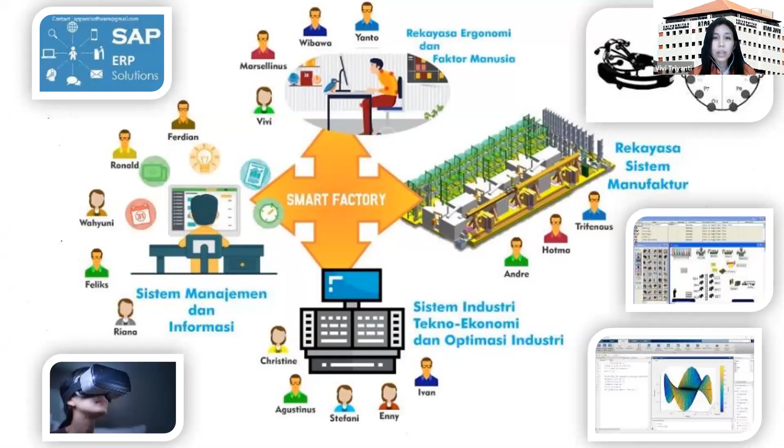Di TI Atmajaya sendiri, kita mempunyai banyak tenaga pengajar, kemudian lab yang sudah diceritakan oleh Pak Felix, untuk bisa menjadi smart factory yang bisa menghasilkan lulusan yang siap menghadapi era industri 4.0. Oke, kita akan memasuki acara utama kita, yaitu paparan mengenai smart manufacturing.

Sebelumnya, perkenankan saya untuk memperkenalkan Profesor Huang. Halo, Profesor.

Nice to meet you again in this online room. Hopefully you're always fine and safe, especially in this pandemic season. Okay, oh sorry, I have to unmute first the professor. Okay.

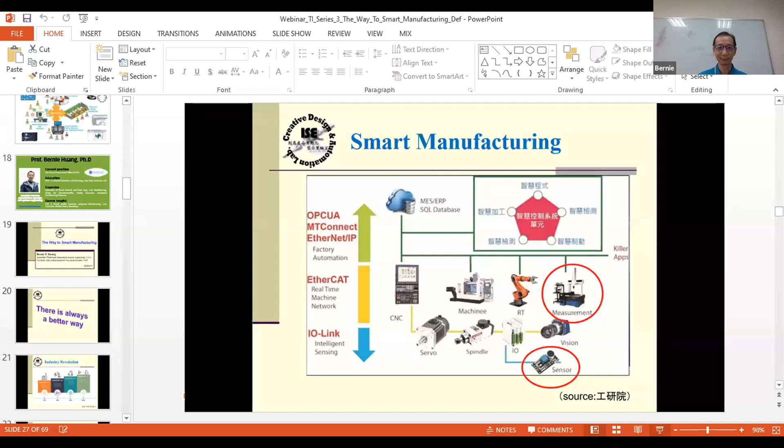Thank you. Okay. Hello, everyone, all the professors and students from Atma Jaya and Indonesia.

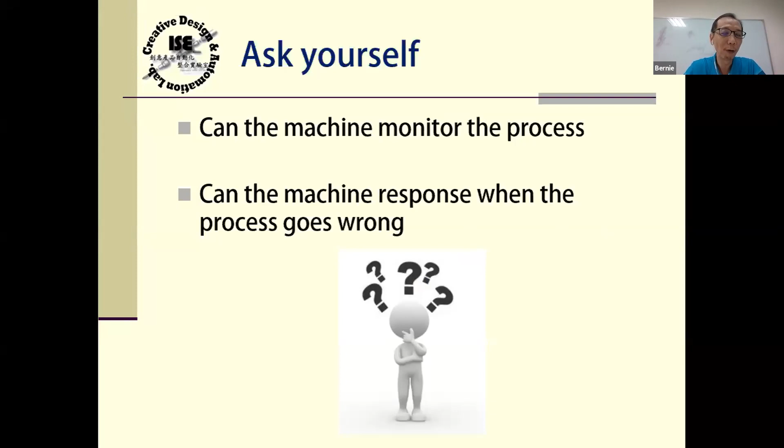So this is the basics - as a machine, as an equipment, as a manufacturing system, if you want to get into smart or intelligent manufacturing, you have to make sure the machine, the equipment, can do that. So I define smart manufacturing simply as: the machine can see something, it can feel something.

The machine can, for example, feel the temperature, feel the vibration, feel the noise. They can do something, they can feel something, they can know something different. So they can also think. They can make a decision when they feel something wrong, when they feel the temperature is too high. What will they do? Try to lower down the temperature, try to cool down, or try to turn off something to cool down. Those are some reactions we have to do.

And we also have to know the machine needs to know how to adjust. Once they make a decision, okay, it's too high, it's too hot, then how many degrees of temperature do I have to drop down, the interaction. So in order to do all these three things, to see something, to feel something, to think, to adjust, for the new equipment we use in smart manufacturing, we have to start using sensing technology, like a sensor.

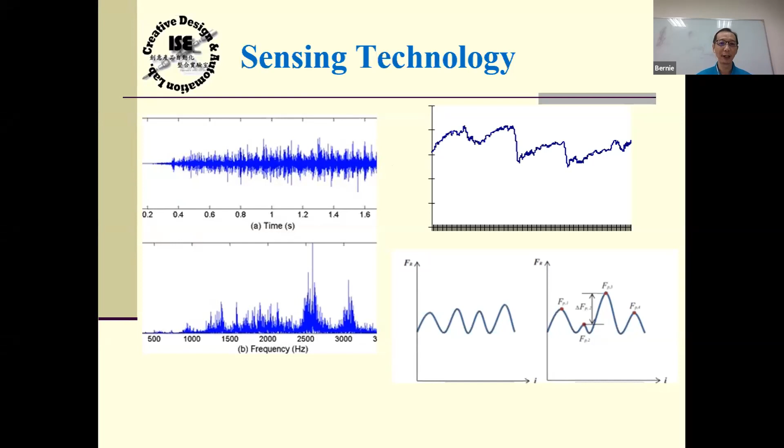For example, my specialty is in smart manufacturing for quality, so I'm pretty focused on quality issues. That means everything when we fabricate, when we make it, we think about the quality. Just like the example I mentioned earlier, the coffee bean - for the coffee bean, I would like to know if it's in good quality or not, so I have to look at the signal to see what kind of signal is good for it. Once we got that, the next stage we have to do is make a proper decision.

All right, for the air conditioning, if the temperature is too high, what will I do? Right now, if the temperature is higher than what I expect, what will I do? If it's 1 degree higher, what will I do? 5 degrees higher, what will I do? So for different situations, we need to have a different response.

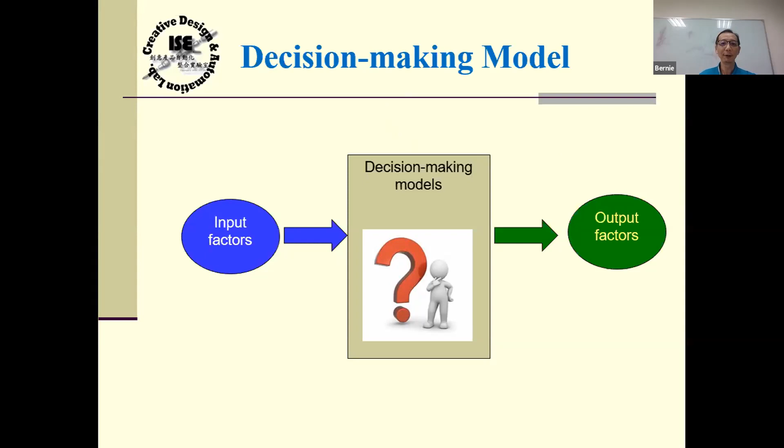That is what we have to do for the decision-making model. So for all those input factors, those sensing technologies, those sensors, we find a useful sensor and put it into the decision-making model. Eventually, the decision-making model will set up an algorithm and tell us what is the result, what's going to happen, what should I do, something like this. Okay, so this is what we always do.

And if you look at the current smart machines that we have, actually because of Industry 4.0, more and more equipment companies, when they develop their equipment, their machines, they try to make their machines smarter, so they can do something to replace our human operators.

So far, the machines that we have, that we always see, are like a healthy smart machine. That means the machine can do its own diagnosis. They can know their status.

So far, let me set up an example, the vehicle. Currently, vehicles are getting smarter and smarter. The vehicle right now can tell you, okay, you have to change the oil. Or sometimes the vehicle will tell you your tire pressure is a little bit low, and you have to fill it. Something like this. Those are the so-called status diagnosis.

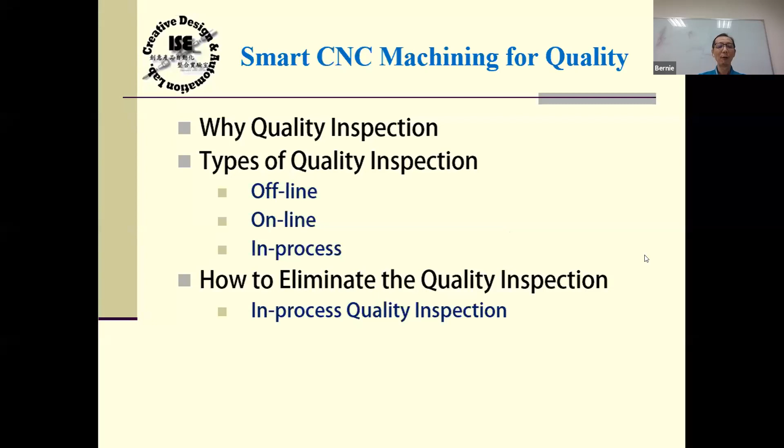So this is what we want to put into smart manufacturing. That means in the future, for every machine, we might mount a lot of sensors, and we might develop a lot of decision-making algorithms in there.

Once the machine starts to fabricate the material, at the same time I will know exactly if the quality is good or bad. So you don't have to bring the part to another machine to do another inspection. You don't have to do that. So that's the goal we would like to achieve in our smart machining, in our smart manufacturing. Once we can successfully conduct smart machining, then achieving smart manufacturing will no longer be a dream. It will be easier to do that.

So for this part, the earlier parts I already mentioned gave you a big picture about what is smart manufacturing, and what is required for smart manufacturing. For anyone interested in Industrial 4.0, if you are interested in smart manufacturing, this might be a direction, something you can think about for your future career, or something to prepare for your future study.

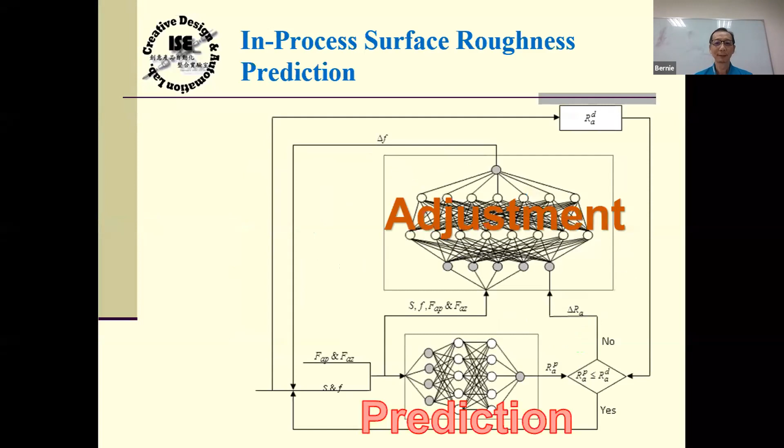That means we will let the machine - it's not only have the decision-making model, not only know how to adjust the machine status, but we also want the machine to have the ability to learn. Everybody, we have to know every machine, every equipment gets older and older. The condition of the new machine is quite different from the condition of the old machine. So when the machine gets old, some conditions change, and we also expect the machine has the ability to learn by itself, so it can adjust some of the parameters by itself. That's the key point I put in this paper.

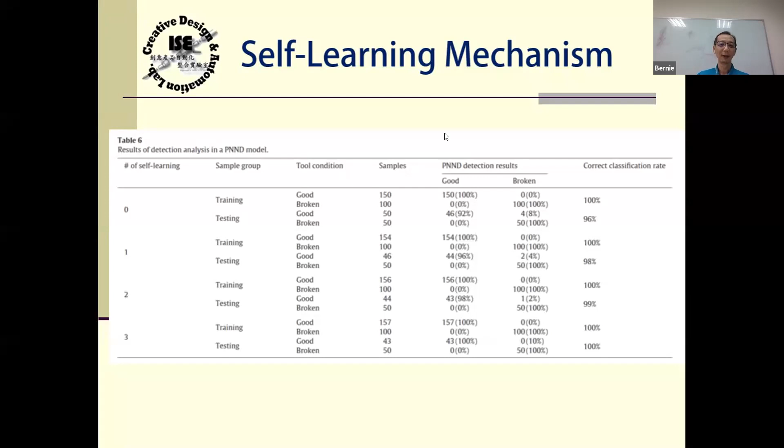All right, okay, how much time? So I think the time is probably up.

The following is just some of my own research, related to smart manufacturing and smart machining, using all those concepts that I mentioned earlier. The only difference might be the algorithm I use. For example, here I use neural networks to do surface roughness monitoring. So those could be very good research topics for students to conduct.

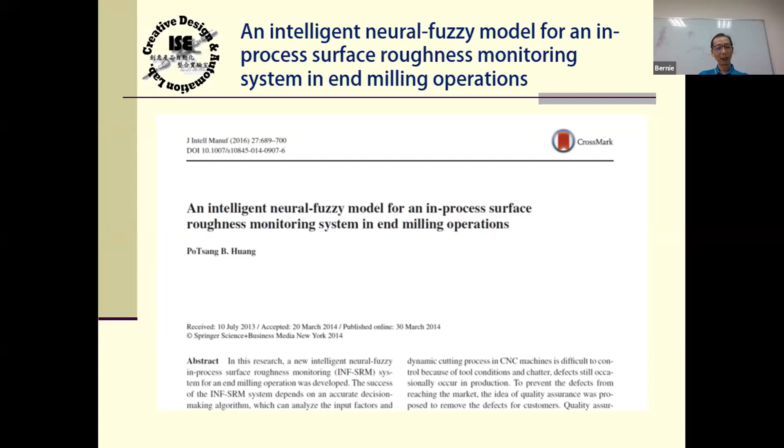So if right now you are an undergraduate student at Atma Jaya, and if you are interested, as the department chair mentioned about the 3+1+1 program, and if you are interested in this area, you can come to CYCU to find me, okay?

These I will just pass through quickly, just to show you some of the results, how I did it, how I set this up.

So the last one I want to tell you about is the newest one, the newest development in smart manufacturing. We call this online training. That means I will train the model in a very short period of time. This is good for high variety products, especially if you work in a factory where you will find the production line always changes.

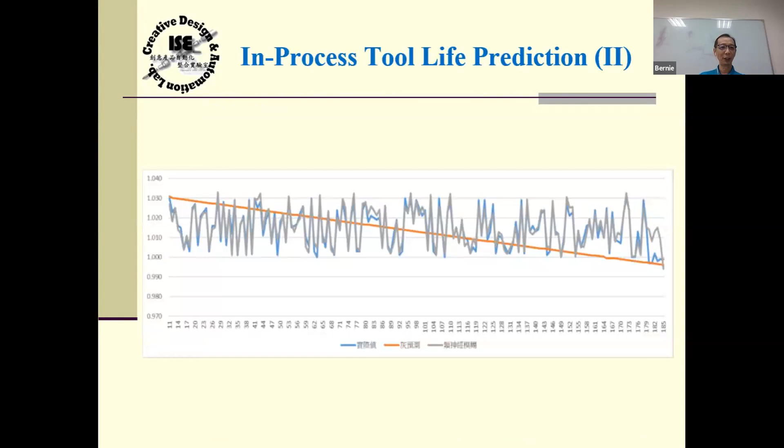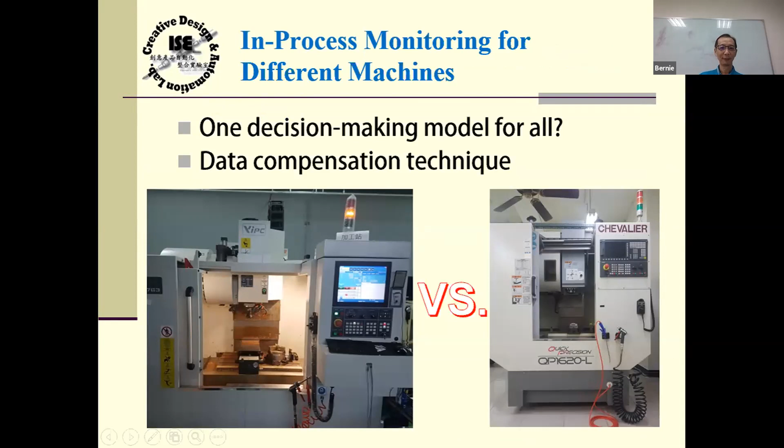So finally, let me just simply say it again. If you want to do smart manufacturing, you have to define a proper sensing technology and sensing signal - that's one. Then develop a proper decision-making model, such as neural network, grey theory, or genetic algorithm - all these can be good decision-making models. And the third one is to make sure it is adaptive, so it can help your machine to change. That's the most important part. So the above part is about smart manufacturing, the way to smart manufacturing.

I'll just give you a very brief introduction about how to conduct this. So that should be okay, next.

So I think next I should introduce - I will spend a couple minutes to give students an introduction about CYCU, Chung Yuan Christian University. If some of you are really interested in this 3+1+1 program, you complete your bachelor's for the first 3 years at Atma Jaya, and then in the 4th year you come to CYCU as an exchange student. And then if everything goes well, it is possible for you to spend just 1 more year to get the master's degree at CYCU.

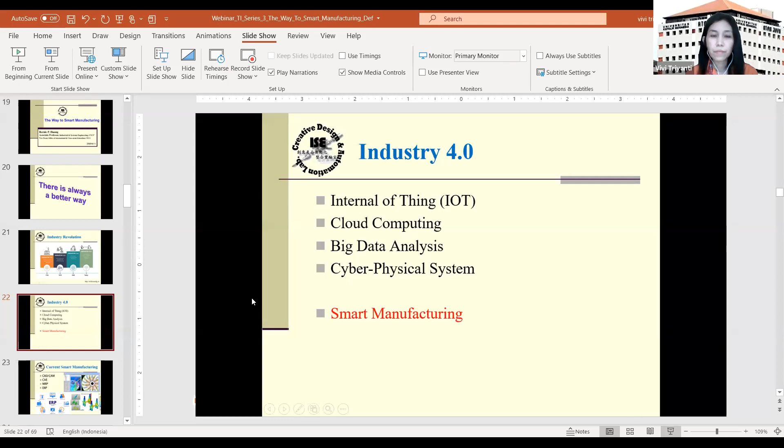Okay, now is the time for the question and answer session. Oh sorry, I have to close this first because of the chat, it's on the chat. Sorry, wait.

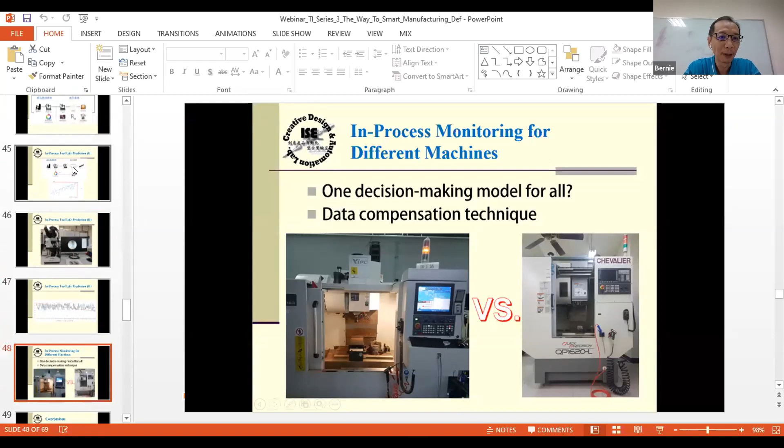That's the real situation we face every day. So when we develop, that is the one I mentioned in my last slide, we're talking about online training. The traditional way for smart manufacturing is to use big data, collect a lot of data, and train a decision-making model. However, sometimes once we change the products or change the material, the model could not be suitable.

So in these 2 or 3 years, I've used this online training method. This method does have a limitation. Because I want to do online training, I need to get the decision-making model in a very short period of time, so the algorithm must only accept a few data sets. Those few data sets are probably data I get from the change-over period.

When we want to change from one product to another, normally we have to set up the machine. During the setup process, I might collect some data, some information. With those limited data, can I build a decision-making model? If I can build it, then that is what we call online training.

If you are interested in this area, right now the decision-making algorithms that can be used for online training are limited. I'll give you a direction for study: right now we can use what we call grey prediction, that is the tool we can use to develop the algorithm for online training.

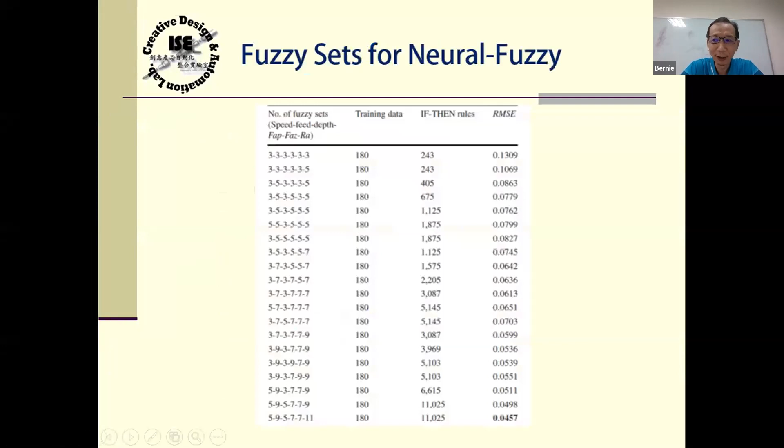Actually, right now currently the biggest challenge is data collection. We can collect big data analysis. Every day, if a company or factory has already become an automatic factory, they might collect a lot of data, a lot of information every day. However, the issue is they don't know how to use that data. You will see every day, in every company's database, there's a bunch of information. However, how to make that information become useful - that's the challenge.

The second challenge is sensing technology. If you would like to run Industry 4.0, the sensor in each equipment is very important. Without those sensors, it's not easy to control the machines. So there will be a lot of cost for the company, because they either have to change their equipment to a new machine, or they have to manually install those sensors into their machine. Both of these will cost them a lot - that's going to be a big challenge for the factory.

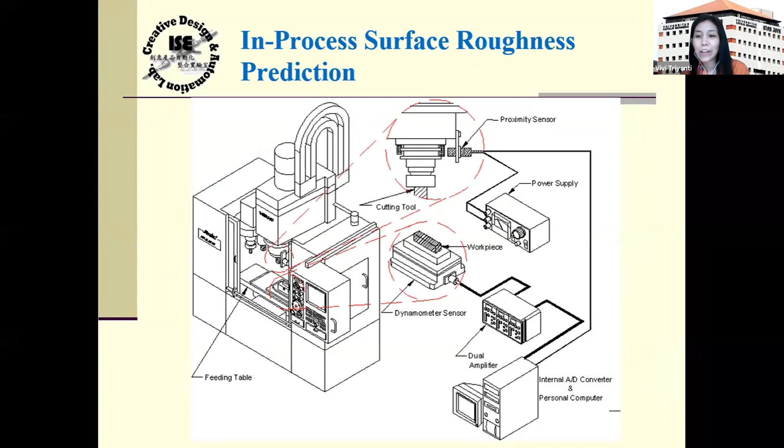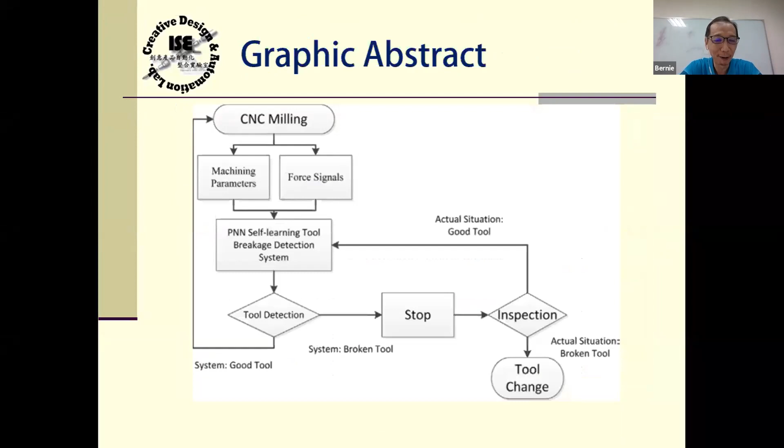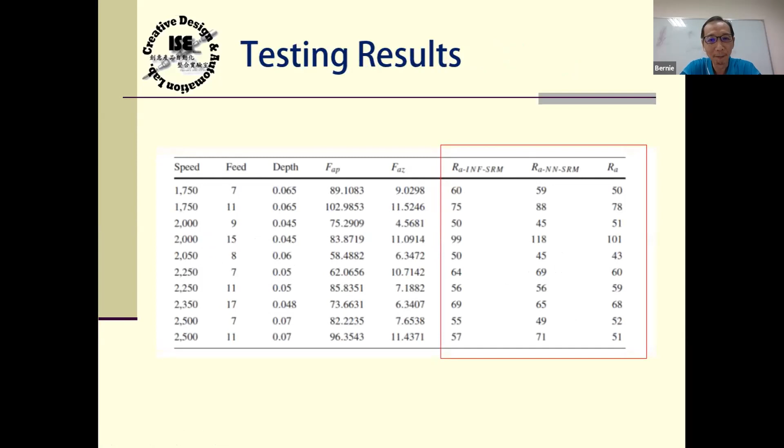Optimal is what we are still pursuing. During the last decade, I conducted many research projects in this area. I still cannot say it is the best. We can always still find some way to make it better. So I cannot tell you the answer of what is optimal. I can only share with you the direction.

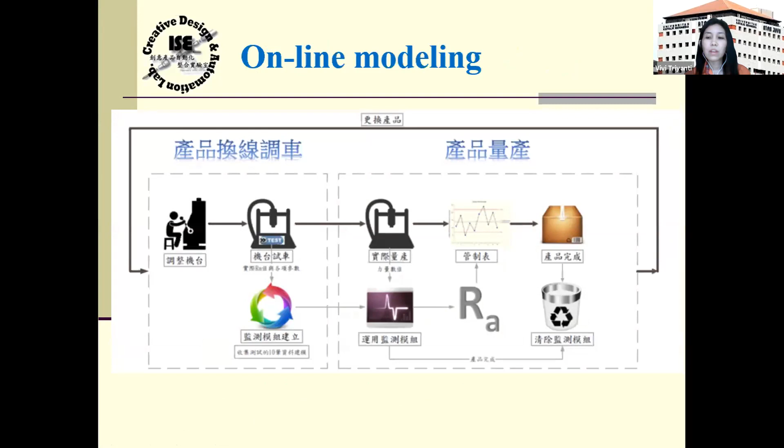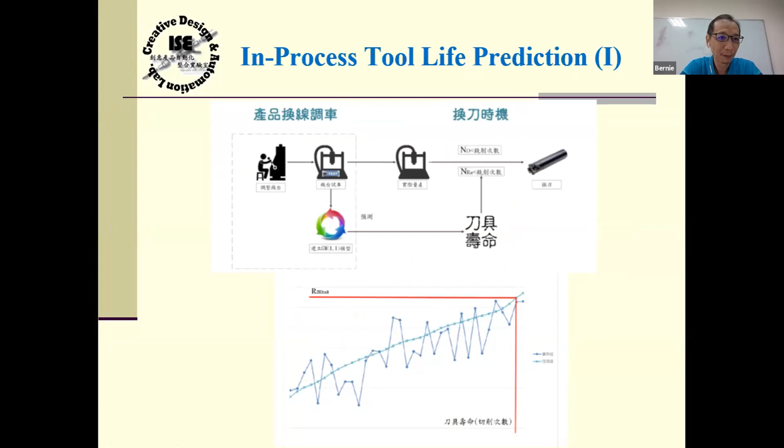Once we get into the research, it's actually from what really happened in the industry. We try to satisfy the need of the industry. When you get into the company, you see their problem, then you try to find a way to help them find a solution. So just what I did, solve it one by one, and one day you will get close to the optimum.

Okay, that's the continuation of the question from Mr. Bonilax. Are there differences in performance between facility layout in classical manufacturing facilities and smart manufacturing? So the difference between the classical and the smart layout?

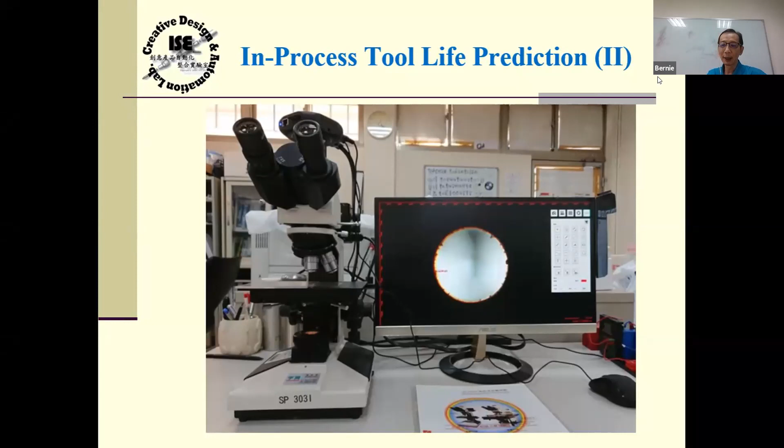Manufacturing layout, yes. Well, basically, you don't have to make a big change. It depends. If your layout is already at the level of Industrial 3.0, where basically all the facilities you have are already automatic, then you don't have to make a big change. It's going to be easier for you to get from 3.0 to 4.0. However, if the facility, the equipment you have in the factory, is only up to Industrial 2.0, then you have to change the layout, depending on how you might need to reorganize the equipment and the facility to make it smarter.

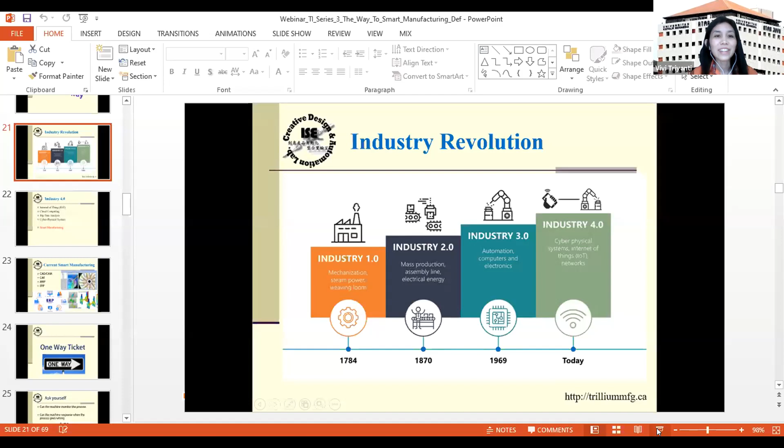However, it still depends on what kind of product you fabricate. So it depends on the status of the current facility layout. If it is already fit to Industry 3.0, then it will be easier. If the classical facility is still in Industry 2.0 and so on, they might take a longer time, or the overall layout needs to be rearranged.

Mr. Bonilax said it's not optimal layout, but appropriateness. Is the answer the same or maybe different? If I say, oh, it's not what he means, not optimal layout, but appropriateness of layout, could it be the same? Yeah, right now we will say probably it's a proper layout.

Normally, because when we're talking about Industrial 4.0, actually it's based on Industrial 3.0. And what's the difference? Something that you don't have to do a physical change for. Like the internet, IoT, computer networking. Actually, you will see all those things are just somewhere. When you get into the factory, you probably won't see it. That's the new trend of Industrial 4.0.

Okay, so it needs infrastructure like internet and so on. So it will affect the layout. Of course, it will affect the layout. So the layout has to be proper with the new technology, the internet technology, and so on.

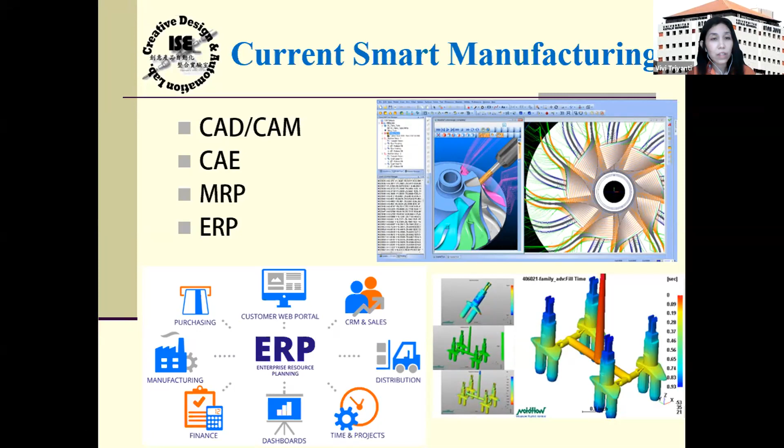So if the student is interested in these two areas, cutting tool quality and material quality for smart manufacturing and smart machining, he is welcome to the department. So your suggestion for topics is cutting tool quality or material quality for smart manufacturing. Yes, yes.

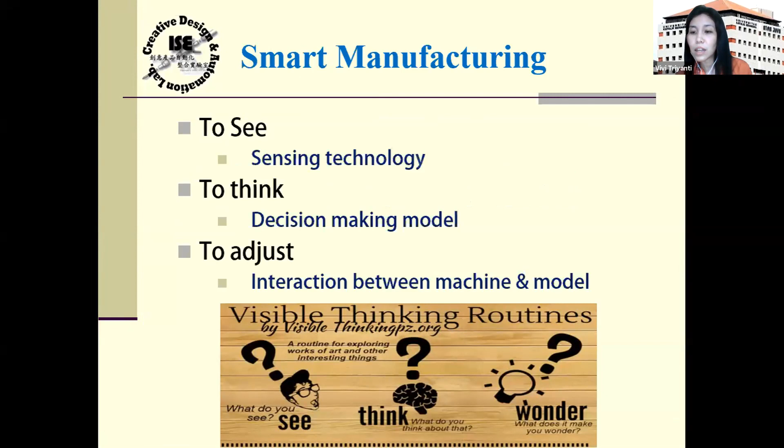Hello, hi Iwan. Professor, I have a question because smart manufacturing is very wide - for example it can detect tooling failures, or exactly predictive maintenance, agile production lines, supply chain. So from what we have now, the technology and the human resources, what would be the easiest way to implement, to start first?

What will be the easiest way? Yes, correct - to implement the smart manufacturing.

Good question, but not easy to answer. Well, I would say, if you would like to make the research more related to the practical, probably I would suggest you to observe what's the current situation of industry in Indonesia, so you can base your development on the current situation.

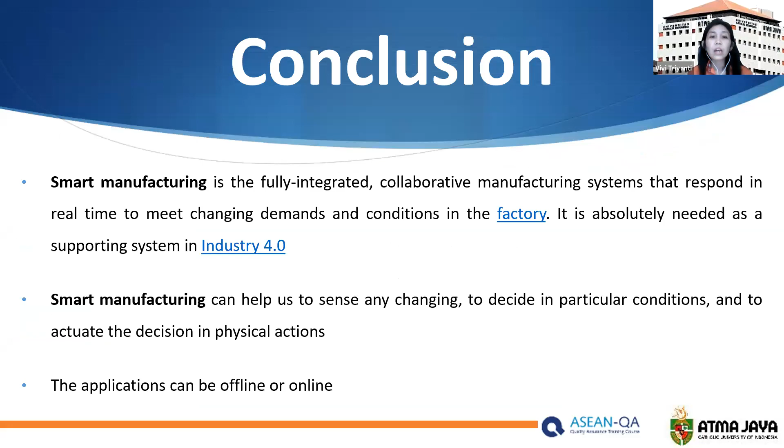Oke, saya akan memberikan sedikit konklusi mengenai topik kita hari ini. Jadi, smart manufacturing, kalau kita lihat sebenarnya adalah fully integrated dan collaborative manufacturing system yang bisa merespon secara real time perubahan-perubahan yang ada dalam kondisi di sistem kita, ya. Dalam hal ini misalnya factory.

Jadi, smart manufacturing itu kebutuhan utama jika kita mau memasuki industri 4.0.

Fungsinya smart manufacturing bisa untuk sense any changing tadi dengan sensor untuk menangkap data, kemudian dengan berbagai model decision making bisa digunakan untuk mengambil keputusan dan juga bisa digunakan untuk mengaktualisasi keputusan menjadi suatu physical action. Dan aplikasinya sebenarnya bisa tidak harus online, bisa offline, bisa online, tapi dengan berbagai benefit dan limitation dari masing-masing cara, baik offline maupun online. Oke?